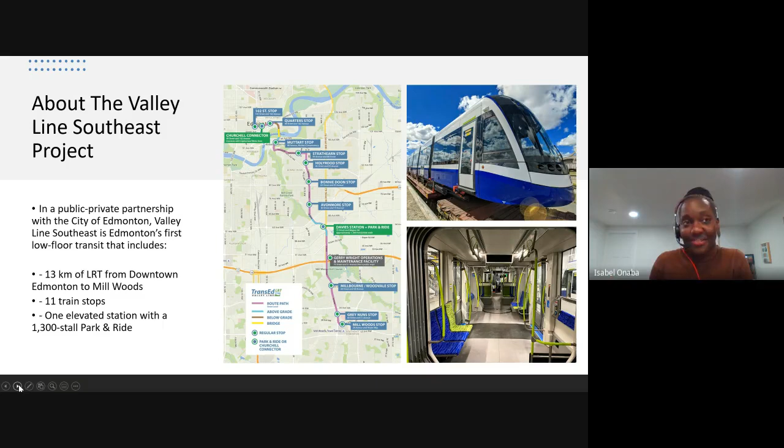Look at that train, look at the inside of that train, it's just so beautiful. I don't even think the photo does it justice, it just looks as amazing as that. That's right, even better. Yeah, I've been in it myself. It's an amazing piece of work for sure, and we're going to hear more about it later in the presentation.

TransEd, for those of you that may not know, is a consortium of Bechtel, Ellis Don, Bombardier, and Fengate.

We are a partnership working with the City of Edmonton as a P3. This is the first and largest one the city's ever done, and we're really excited to be a part of it. We're nearing the end of construction, moving into commissioning. We're anxious to get the public on our trains and operate this system for 30 years. TransEd isn't going away at the end of construction; we're here for another 30 years to operate this system for the City of Edmonton and its citizens.

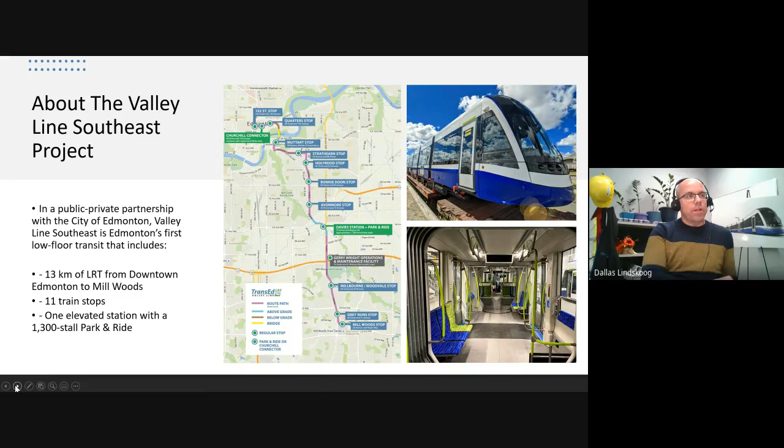Welcome aboard very soon. I think we're going to start in the downtown area. So Ken, I'm going to bring you up on this one. Why don't you tell us a little bit about what we see in the photos here right now?

Sure, I'd love to. I am the area manager responsible for downtown, and we're building an LRT—actually more than an LRT. We're building from face of building to face of building with tremendous coordination and patience from the local residents, businesses, and communities. Thanks to them for their patience as we work hard to build it right and coordinate as best we can, getting down to the last stages of the heavy civil work.

What we're looking at here is Harbin Road. We are pouring the Class B on the left, and you can see where we're topping off with the finished product, the paving stones, on the right. In the background you can see the Chinese structure, the main structure—there's still some artwork to go on the roofing, but that will be the Chinese structure when we're done.

That looks like a hole in the ground—is that the tunnel portal where the train will come out of the ground? That is the tunnel portal, where we come to grade, right at the corner of Jasper Avenue and 95th. You can see in the background we're loading one of the tunnel fans into the portal, which is now sitting in the tunnel. We can talk about the tunnel in a little bit.

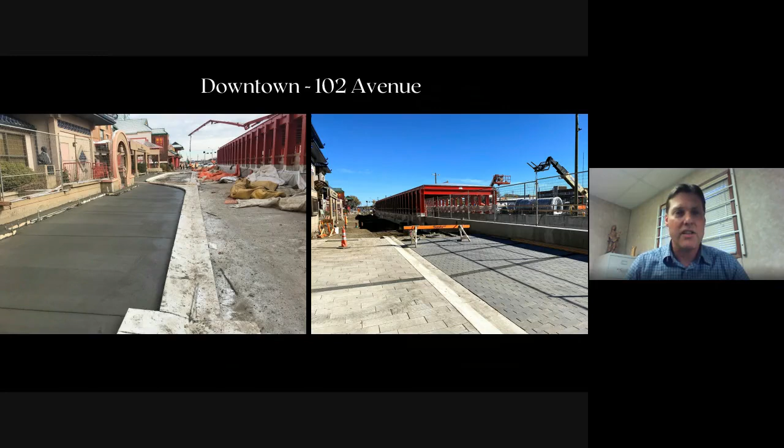Some other interesting things we've done this year: like I said, we're building an LRT station, but we had to build a 2,700 cubic meter underground storm tank to take all the flood water that might affect the City of Edmonton and collect it—that's underneath our track slab. We have also built a resilient track slab in front of the Winspear and Citadel, which we affectionately call the bouncy track, because we have 200 meters of track slab that sits on springs to reduce vibration and noise. It's been an exciting year for the civil works downtown—we have a tremendous amount.

That resilient track, that's right in front of the Winspear and between there and the Citadel—is that right? So that's to prevent noise of the train passing by those important cultural centers, is that correct? Noise as well as vibration, that's correct. That whole track slab is elevated and sitting on springs—very big springs, bigger than the ones on your big pickup trucks. So we're not going to feel any movement if the train's going over top of these springs, it's not like the train's going to bounce, a bouncy track through there? No, there won't be movement—it's to help with noise and vibration, but us construction folks like to coin phrases and call them something a little simpler.

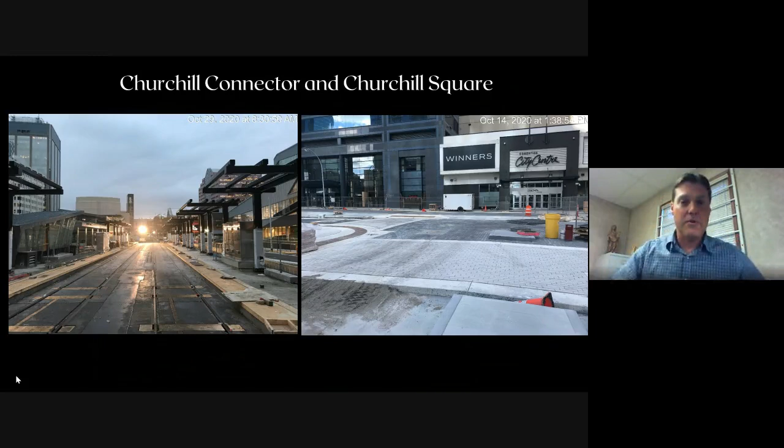Essentially, passengers will get off our network and go through the connector station. We're finishing the dress out of the connector building, putting in escalators, doing the mechanical, electrical, and the system. Our whole traction power system for the downtown network is housed in the basement level of the connector station. We're doing the building finishes and just getting to the systems part, which Eric will talk about later. If you walk by that building, residents of Edmonton in the downtown area would have seen a hole in the ground for a while. We were doing a lot of work underground, installing those systems, all rooms below the surface. What we see above ground is really just the connection to stairs, escalators, and elevators. That's why we call it the connector - it ties right into the existing station at the mezzanine level.

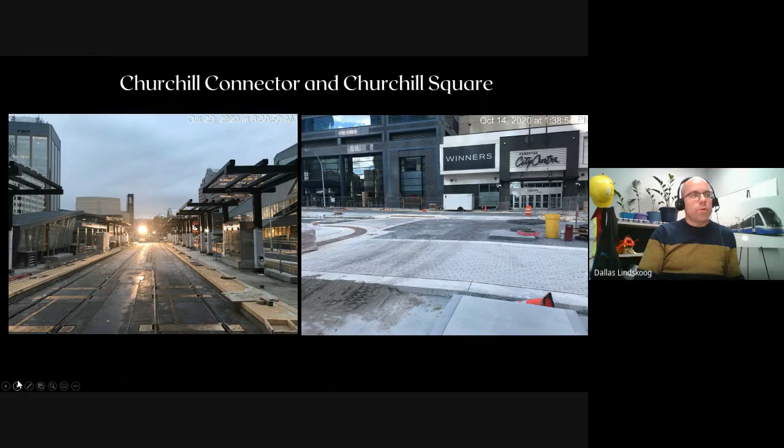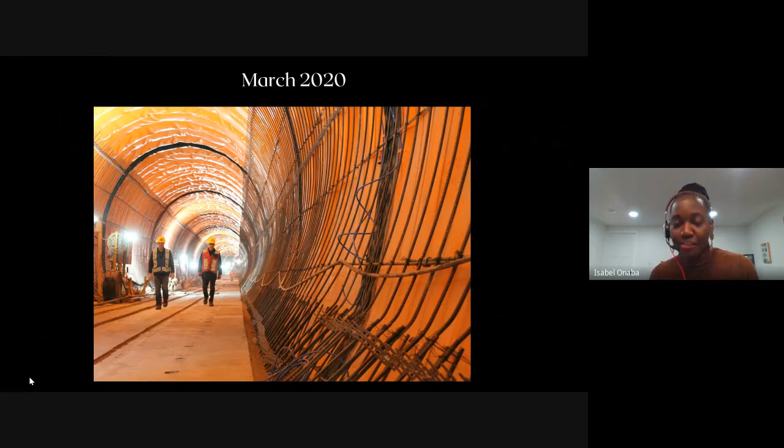Awesome, Isabel, I'm going to hand it over to you. Okay, so for me, this photo is one of those that's like slow motion, movie worthy, like cover of a movie actually. This is one of the photos we took at the media event, I think it was in March, when we had media come by to look at the progress we'd made in the tunnel.

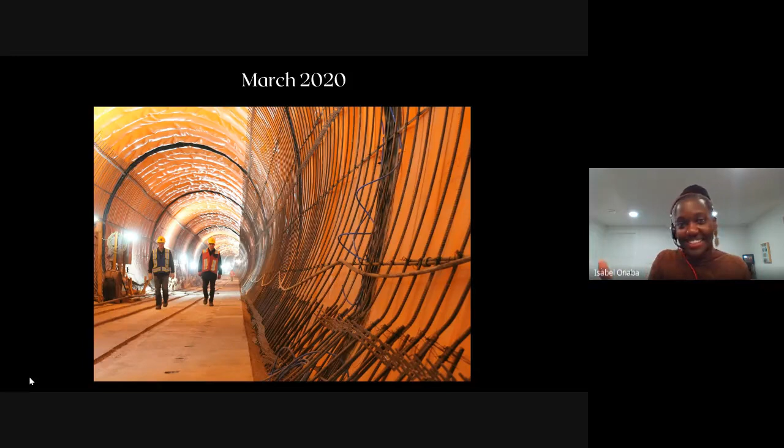Isabel, talk about those two gentlemen in the picture. Those guys are just viewers really. Not too much to say about them - that's Mr. Ken Sullivan there. Couple good-looking guys right there.

All right, Ken, tell us a little bit about what we're seeing in the tunnel. Sure, this is actually a really great photo, Isabel, nice job on it. The vibrant orange is a PVC waterproofing membrane, so the tunnels are a completely tanked waterproof system. What we're looking at in this picture is the waterproofing and reinforcing steel, getting ready for the concrete pours. You can see that Dallas and I are walking on the invert slab - the invert has already been poured in this photo.

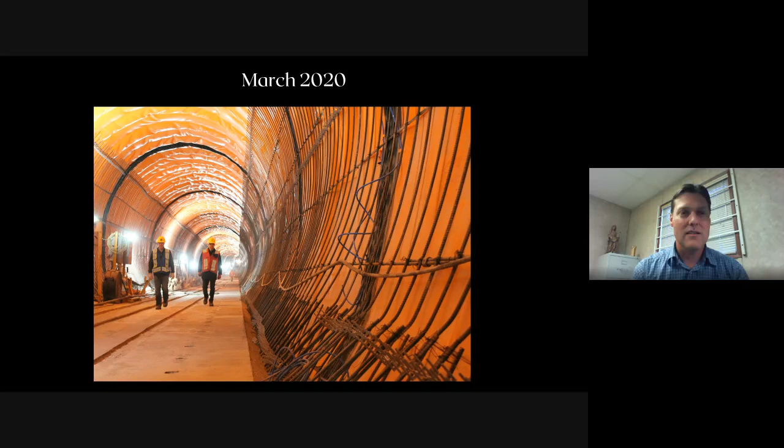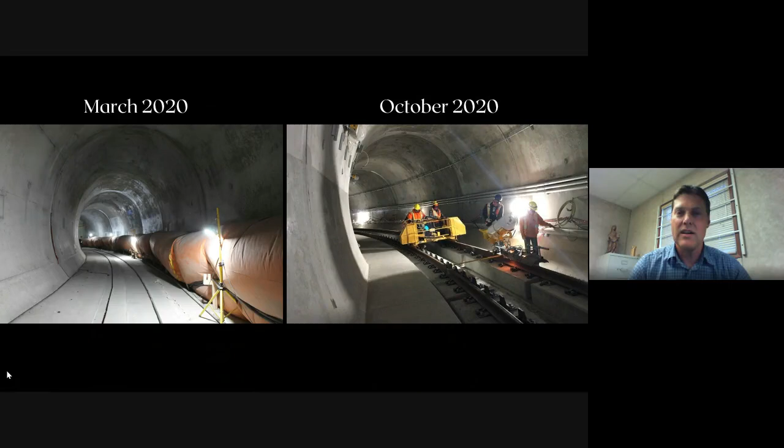Let's take a look at the next slide. One thing I should have mentioned - we have twin tunnels, both 6-meter diameter. Dallas and I, the photo in March was in the northbound tunnel. This is a picture on the southbound tunnel where you can see the actual arch concrete, the final lining, has been cast. Between March and now we've spent a lot of time - we've cast in walkways, put in the plinths, which is what the rail actually sits on, elevated concrete slabs. You can see us fine tuning the rail in the right-hand photo, and a lot of the electrical lighting going in. We're really at the finishing stages of the tunnel.

All right, I think we're switching over now. Yeah, this is the Tawatinâ Bridge.

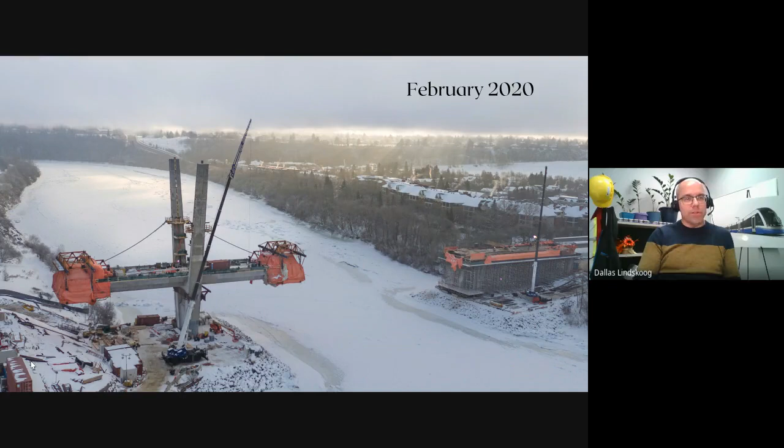All right, bringing in Mr. Brian Connolly. Brian, why don't you tell us what we see in the picture here back in February, and walk us through the progress of installing the cable stays. We see one in the picture there, but you have a lot more information that I think you can share with the team and with those watching today that they'll find interesting. So take us through that, would you?

Yeah, I'll take you back to a time in the project where we're all looking at this giant gap between the north and south of the river. I'm wondering if we're ever going to get there. And certainly when you look at the weather in that picture, everything is frozen, everything's dark and it's bleak, and our days are quite short. We wondered at what stage would we touch down on the south side of that river.

But for all the bridge aficionados out there listening, the Tawatinâ Bridge is an extradosed cable-stayed bridge. I'm not going to get into the details of what makes it extradosed, but a key feature is the shortened tower heights.

So there's a lot of work going on with the slab itself, a significant amount of work in the slab and the post tensioning to take some of the pressure off the shorter towers. But in this photo here, we're just at segment 6. There are 21 segments that get us across the river and 21 segments that bring us back up to the tunnel, and it's the first segment that takes that cable stay.

At this stage, everything is well hidden within the hoarding structure that we've got there. But there are two elements to the system: we've got the guide pipes and the anchors that are cast into the deck segments, and they angle. The guide pipe angles the pipe coming out of the deck, and it points it up towards the tower itself.

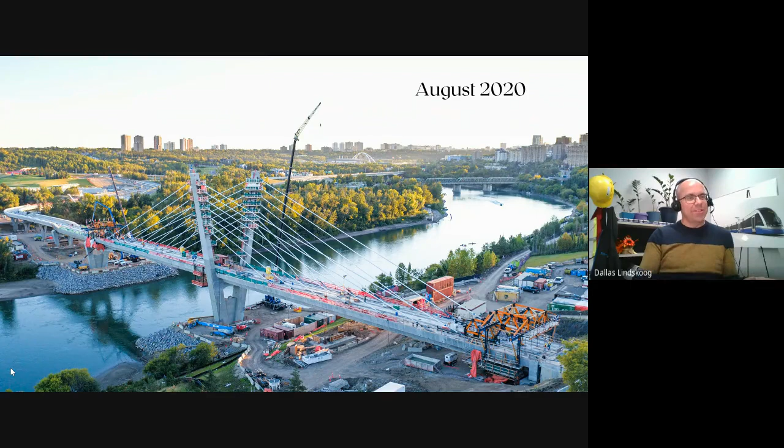Okay, don't hide the number though - you got to tell us, how close was it? Oh, we were within 4 millimeters on our last pour. Wow, which is pretty impressive. Yeah, we're disappointed in the 4 millimeters because we were trending so good, but that last pour, there's just so little opportunity to manipulate the bridge with small adjustments, and then you get it.

But certainly now all 7 stays are in, and at this stage they're tensioned, so we're going to call that stressing, for want of a better word. As we move out to the next segment - so on the previous picture you've seen segment 6 - as we move to segment 7, there's no stay on segment 7, so we get an opportunity to stress those stays and pull those segments up into alignment, and then you move on to segment number 8.

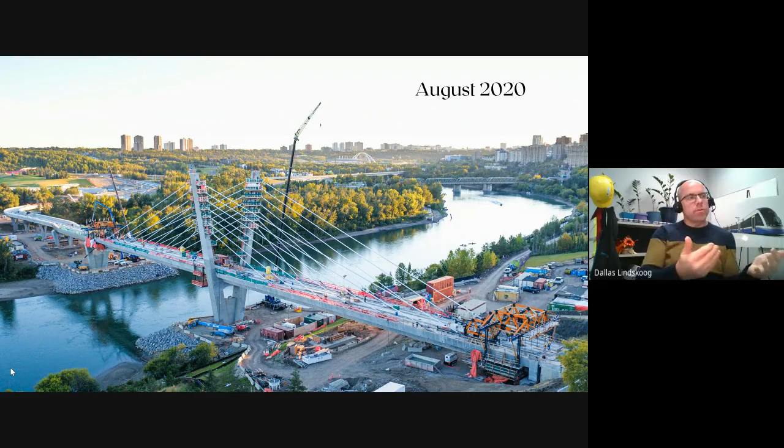So wait a second - you say pull them up. Like, when you stress those cables, when you put tension on those cables, are you saying that will actually bring up the bridge on the ends? You're putting that much force into it?

Oh yeah, absolutely, during its temporary state. And this is the beauty of trusting the engineer and trusting the construction process. The further away you go from the tower - we go back to grade 4 schooling here - and we get to the fulcrum and the lever, and the further away you go with the level of effort, the bigger the deviation is.

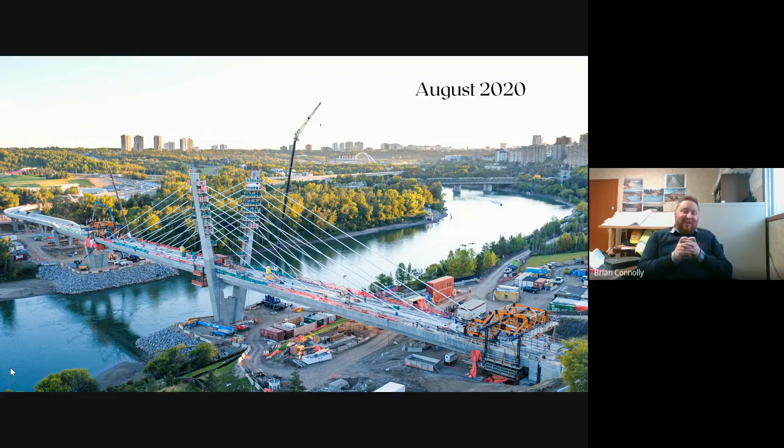We got to the scenario, we got closer to the closure pour, which is the final pour that connects us from north to south. Prior to pouring our concrete, you're looking at about a foot and a half of a difference between where the concrete is pre-pour and after pour, and that's all done with your stays, with your dead load of the concrete weight and the rebar. So you stand on at one stage and you think you're shooting for the moon, and then you get all your load on and everything ties in neatly.

Wow, that's amazing. I have a quick question for Brian. So when you did that final pour, were there any tears of joy just to see the end of this bridge and just to be like, oh, it's now won?

It was, I wouldn't say there was tears of joy, but there certainly was an incredible amount of satisfaction. I think we'd seen through that process, and you've probably seen some of the photographs there, the amount of people it took to build this bridge. We put a flag up of every nation on the bridge as we were constructing it, of everybody that came together to build this bridge. On that closure pour, in a COVID scenario where it's difficult to get people together and celebrate, we all stood 2 meters apart and looked around at each other and virtually patted each other on the back, because it's an incredible achievement. Given the season we had, everything was frozen, everything was hoarded up, and to get through that phase of works and into the summer, it was a 7-day-a-week schedule, 12 to 16-hour days. It was joy. It was a relief. I don't know if there was tears.

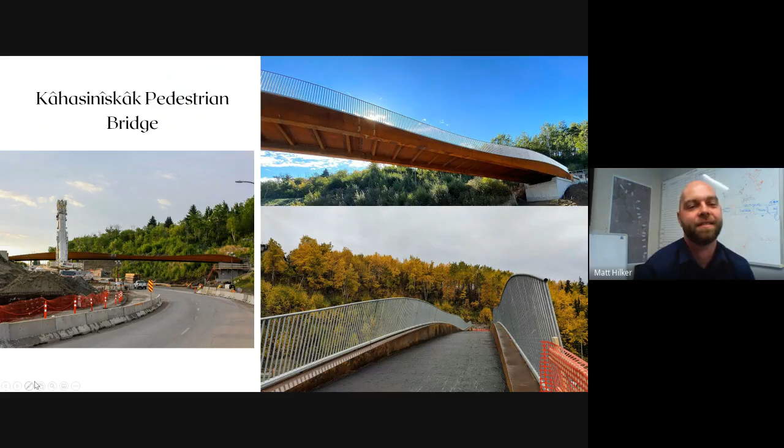So this one, as you can see, it looks a little harder to pronounce. I'm going to put Matt on the spot just because I'm picking him, he's the first one I looked at on my screen. Matt, I'm going to let you try. I've got the Davies Station, that's easy enough, Davies, the D. The Kâhasinîskâk pedestrian bridge. Ooh, so close. Actually, that's pretty good, not bad. You give me a hand? Yep. All right, the way you say that is Kâhasinîskâk.

Kâhasinîskâk, another Cree word. And Isabel, what does it mean? One second, let me just find that. Oh, I'm putting you on the spot now. Okay, well, you look that up. I'll tell the folks a little bit about this bridge.

So this, again, replaces another pedestrian bridge over Connors Road. This is as you're heading up Connors Road. The original bridge was a little too short, you can't get the trains underneath it, so it needed to be raised. In the process of raising it, it was also replaced. Additionally, for those familiar with the trail systems in the river valley, there was a 90-degree bend on each end of that bridge that was a fairly hazardous bend for cyclists coming through. Maybe not someone walking or running, but cyclists for sure had to make a pretty tight bend as they were coming down the trail system. So as part of raising the bridge, it's also been realigned slightly. It crosses Connors Road now at an angle, and it also has an additional pier located between the roadway and the trackway. Beautiful bridge, you can see some design elements incorporated into it.

The whole project here is interesting. For those who may not know, there's a lot of effort put into the architectural designs that TransEd's been building here. We call that sustainable urban integration, and it touches absolutely everything that we build. We have architects on the team working directly with the city and following their requirements, which are very important to the city, to make sure that everything being built is integrated with the environment it's located within. This Kâhasinîskâk bridge is no different than anything else on the alignment, so we're proud of that. As you can see, it's well underway, construction open to pedestrians and cyclists right now, so get yourself down there and go for a walk in our beautiful river valley.

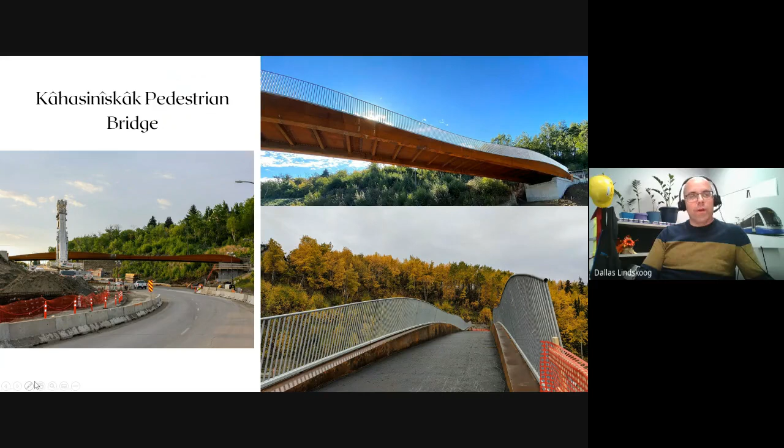Kâhasinîskâk actually means slow moving water over stones. Awesome.

Okay, let's keep moving. Let's go to Marisol to tell us a little bit about landscaping. People have been seeing lots of beautiful things happening around the tracks and the train system that we're putting up, so give us a little bit of an update. Yeah, this is actually perfect to talk about landscaping because we were just looking at areas on the north and south sides of the river and around Connors Road, where we've done a lot of landscaping over the last season. Along the alignment, there are a lot of areas that require landscaping along the track and the residential areas. But part of our landscaping is also to do restoration, which is really neat. So some of the things I want to highlight are about the types of restoration we're doing on the project and have completed so far.

So in total, there is about 5 acres of landscaping that we're doing on the project, but that includes restoration. We have naturalization areas, native forest restoration areas, and also some fisheries habitat enhancement and offsetting areas as well, all encompassed under that scope of restoration.

In the photos you can see, some of the really neat features in the restoration work we're doing is, one, we're reestablishing the native plants that were already in that area before we disturbed it with construction. We want to restore these areas back to how they were before with that native vegetation. In that big photo, that's actually on the south side of Connors Road, and you can see a few of the different features we've installed.

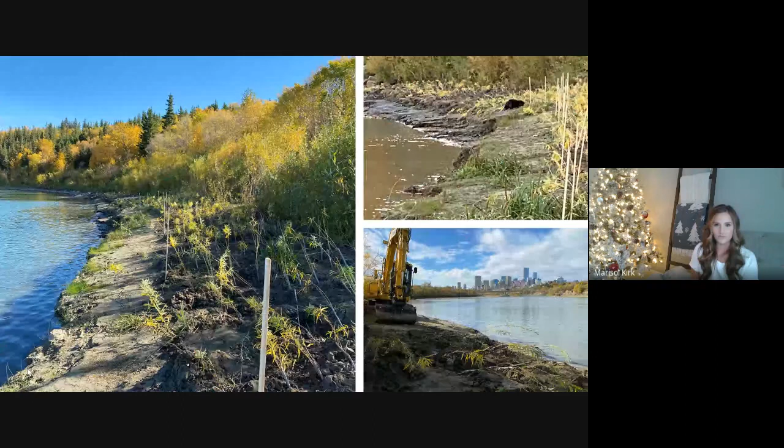So if you go into the next slide, a lot of people might not know what live stakes are. The ones in this photo are part of our habitat enhancement for fisheries. A live stake is essentially, it looks like a stick - you're not taking a typical plant with a root ball that you'd install into the soil, but essentially you take a cutting from the plant material and install that into the soil, and eventually it will sprout.

It's going to develop roots, which helps us stabilize the soil and prevent erosion. In these areas along the river, that's also going to provide shade and develop a really nice habitat for fish, with protection and cover for them and other wildlife too. This is something we completed this fall, where you can see all the leaves sticking up along the bank - those are all the live stakes of willow that we installed into the riverbank.

Marisol, that picture on the bottom right, that's an excavator beside the river. Is that the Tawatinâ Bridge in the background? It seems like we're a long way from the bridge. What are we doing working so far downstream?

So it is a ways out, but part of the bridge construction involved these big berms in the water, which took up a pretty big footprint in the river. Part of our requirements to get approvals to do that work in the river was to do some fisheries habitat offsetting, since those berms took up good habitat for fish to spawn and thrive. So we had to create areas to enhance the habitat. We identified a few locations along the south bank of the river where we did restoration treatments using gravel bar, toe staking, and live staking to help create more habitat for fish.

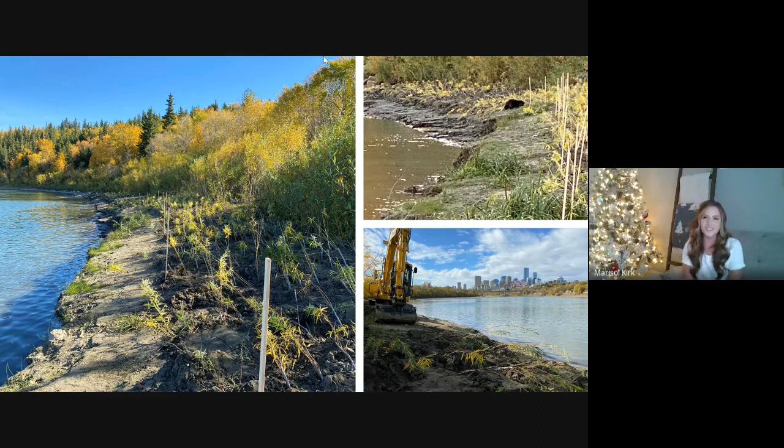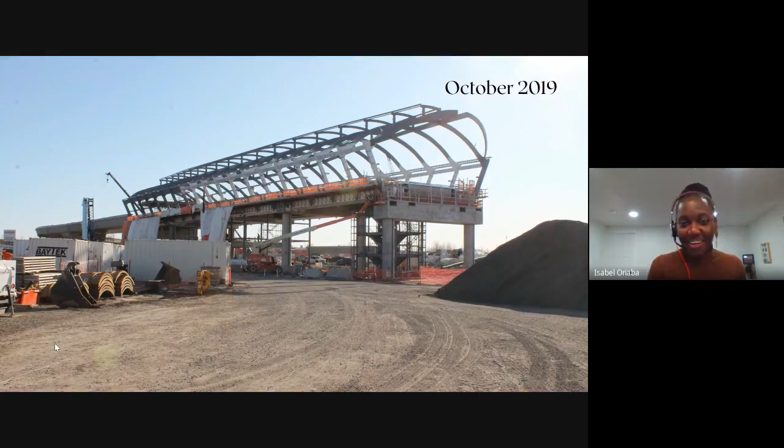All right Matt, I think we're heading down to Davies Station now, buddy. So shine up your forehead, tell us a little bit about what's going on down there. Actually wait, Matt, before you start, is your full name Matthew? I always wondered about that. Carry on, sorry. For a while I was the only Matthew on site, it was bizarre, now there's like 6 of us.

So Davies Station - thank you for letting this clip go after Marisol's, where it shows the beautiful environmental view, and then it shows Davies yard as we're building up around it. So this is Davies Station from October of 2019. That seems like a lifetime away already.

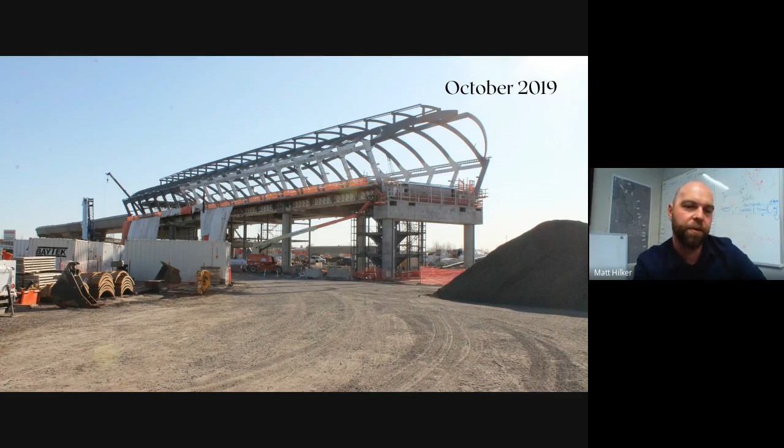A little bit of detail on this picture - you're driving in, looks like coming in off of the north side, off of 75th and Davies and Wagner. But let's go to the next slide, I think we'll see that a little better. Yeah, you probably see it better, ignore the snow, but there you go.

So here we're looking at it in January. Your roof steel is done. Underneath that hoarding where you're seeing all that orange and white is a ton of activity. So what we were doing in that time is the masonry walls were going up on the outside. We were starting to build in all the concrete slabs and everything on the inside of that building as the steel was going in, and you can see the little starts of that timber roof starting to go through.

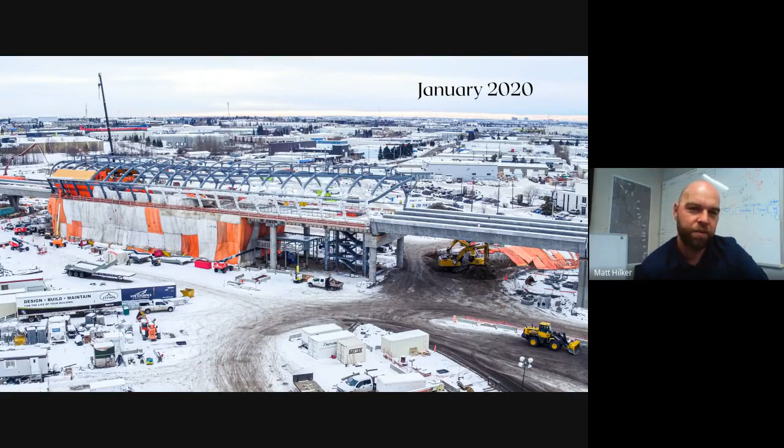So we're going to see more of that in a second here. Yeah, here we go again. As you're driving up 75th, you can see that Davies yard at this point was full of trailers and work - I think we might have even still had the site trailers in on that point. The crane jumping in to get all of that work in.

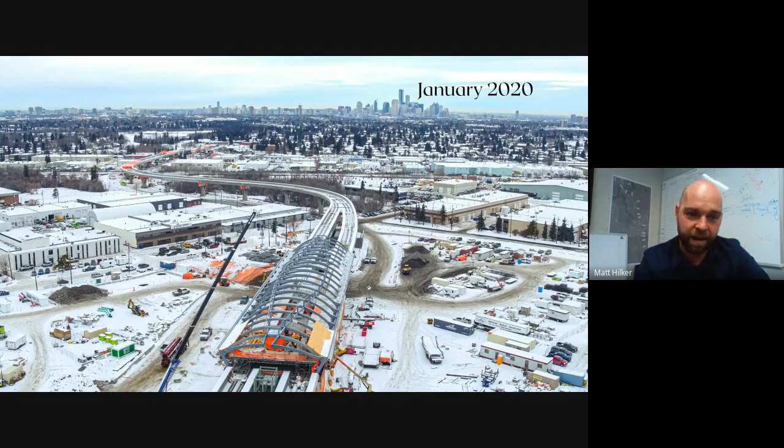That roof steel was a pretty impressive thing to get in. We had to build it up in sections just because it was so wide to get it across the double spans. We had to put in what we called the hockey sticks, which are the vertical pieces that connected up to the track. Then the arches and the clerestory sat in, and they had to get the guys to weld it into place. So it was quite the undertaking, but we got it done. Yeah, fantastic job, I love that photo.

Actually go back for just a second - I mention this anytime I get the opportunity to. What you see in the background on the left there is the elevated guideway, that's the portion of the track that Transed's building. It's about 1.2 kilometers long, if I remember right, and it takes the tracks up over 75th Street, which is a busy commercial corridor, through the Davies Station and Davies Park and Ride, and then over and through Wagner Park, which is the second bend in the photo here. It crosses the railway as well, the heavy rail, and then over top of Argyle Road, comes right back down onto the center of 83rd Street. So about a 1.2 kilometer section, a great place to take a look. If you're driving by now it's very obvious, and something that's very unique in the city of Edmonton as well.

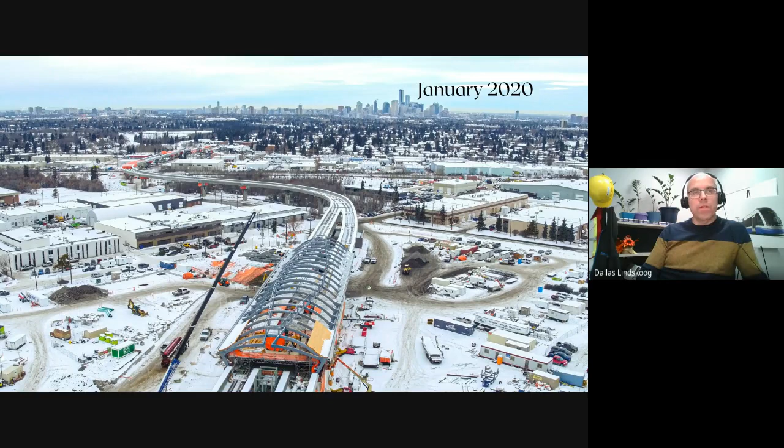What's a soil cell? That sounds odd. Soil cells are underneath, and what they do is retain everything for the soil underneath it so it can be properly set before all of the paving and everything comes in. This allows the environmental and landscaping elements to move around it. There's 2 or 3 of them in the Davies Yard area, which you'll never know about because the entire thing is going to get asphalted and paved.

Yeah, so that was a loaded question. Most of my questions, I probably figured out by now, but the primary reason we put the soil cells in is to provide the soil medium for the vegetation above ground to grow, especially in a parking lot. There's 3 or 4 of them, massive, long stretched soil cells through the medians. I think the public will appreciate that when this park and ride is done and you see all of the trees, you can assume there's a soil cell underneath providing all kinds of soil medium for the growing and health of those trees. It's fairly unique, but also fairly common in parking lot areas and commercial construction.

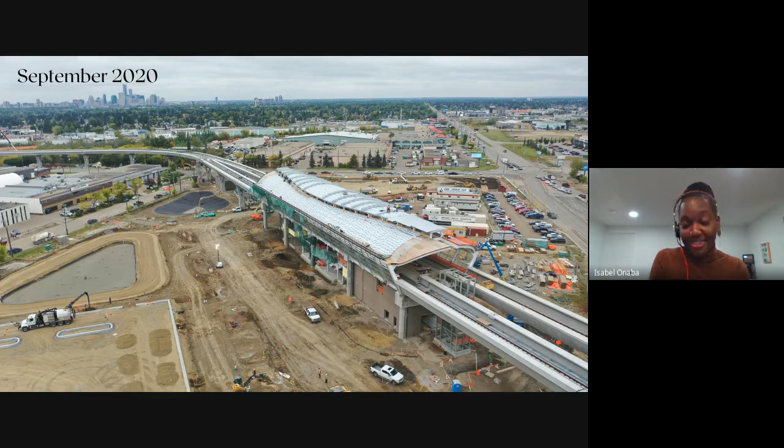There will be. You're going to have to go downstairs to the kiosk, but there will be a place for coffee. Excellent, so a little kiosk of some sort on the mezzanine level. Yeah, there's a little kiosk sitting there that we definitely had to route in, in case somebody needed a coffee to get in there. So yes, you will be able to get coffee. You have to go all the way down to the bottom, the main floor, but yes, you can get it. If you're in the park, you'll hit it right as soon as you come in.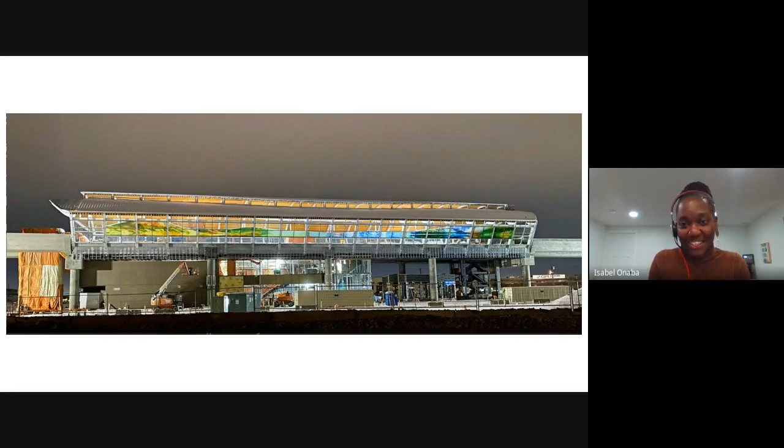My sister-in-law was driving down 75th Street a few days ago, and she came home and said, Isabel, I cannot believe how great this place looks. She was pretty amazed. I feel like my family doesn't believe what I work on, or that I'm actually doing this project, until they see actual steel structures like that. So it's a beautiful, honestly, station. Yeah, and it was amazing when we got that art glass in, it was an undertaking.

That art glass came from Germany. It was being fabricated for 10 months. Design development of it took well over 2 years.

What you're looking at is a landscape, an integrated landscape. I won't get into too much depth or the public artist will kill me because I don't know as much as she knows. But when we got it in and turned on the lights, it really finished off that building, and everybody took a few minutes to sit back and say, wow, that looks fantastic and complete. Just the angle you get from that platform looks fantastic.

So it was a gigantic undertaking. It's very interesting how they got it in. They used a glass manipulator that basically suctions up the panels and lifts them into the air from the ground through a gigantic elevated crane, sucking it into place as the guys beside it put in the clips. They managed to get in all that glass, about 52 pieces in all.

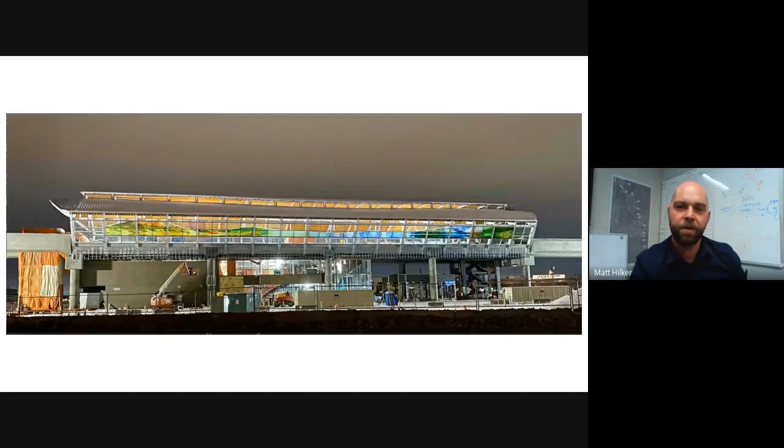So let's go to the next slide, and Matt, tell us how you build that wood roof. The wood roof, that fantastic wood roof, was 15,498 pieces - not that anybody was counting or tracking. That wood roof is a structural timber roof, an SPF roof that was procured, stained, and installed in sections.

It was a very complicated, very difficult thing. It's hard to really see, but the arch and pitch of that roof is very extreme, especially where it comes down in the middle. So what we had to do is build a gigantic scaffolding system in the middle of that station that rolled, which we called the dance floor. We had to put in the panels and nail them in the exact pattern, because it was structural, in order to hit all of those different steel spans.

So what you're looking at is 90 meters of structural timber roof, 2x6 put on end, nailed - a ridiculous amount of time. But once we got that thing in, closed in, and all of that steel was painted, it looked fantastic. We found ways to utilize it, because it took us roughly 3 or 4 months to get that roof down.

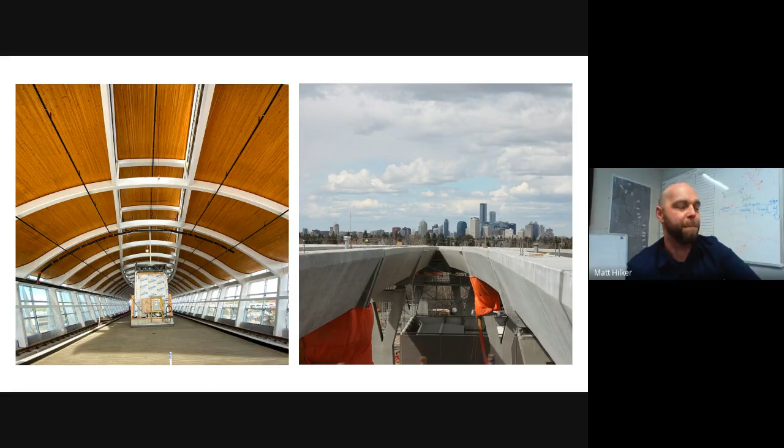Great job. Hey, that photo on the right reminds me, I forgot to point out something earlier. Shout out to Mayor Iveson - we took him on a tour shortly after the wood roof was done, and he stood on one end of the platform. You can't see it, but if you combine these two pictures, in the middle on the left is the framework for an elevator. But if you look beyond the other side of that, you can look out the end of this Davies Station, and framed by this beautiful wood roof is the city skyline. It's an absolutely stunning picture, much like the art glass.

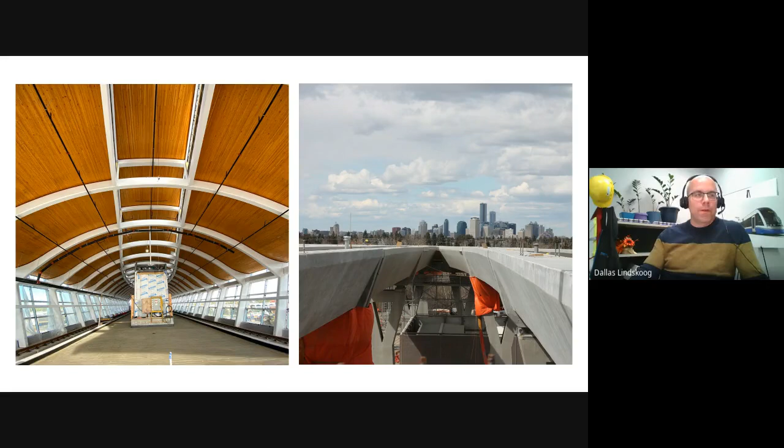I think the next slide might talk a little bit about the parking lot, because it is a park and ride. How many stalls, how many parking lot spots are there, Matt? Somewhere around there - what is it, Dallas? 1,300.

Yeah, a lot for sure.

This area is also a transit center. Around the station you can see stalls where the buses will pull in. It'll be a full-on ETS transit station with a taxi drop-off and a kiss and ride, so it's a fully integrated transit hub for the Valley Line. It's in the middle of an industrial commercial area, so a lot of people will park there to head downtown. That's exactly what it's intended for, so certainly a hub of transportation for the Valley Line.

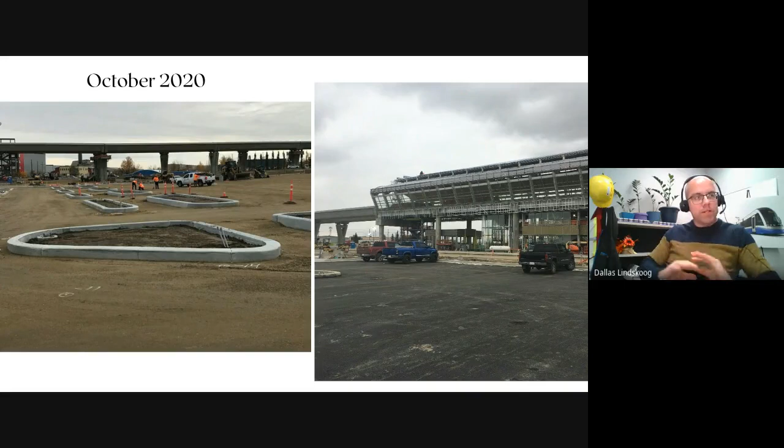All right, Eric. OMF is Operations and Maintenance Facility. So operations and maintenance, Eric, tell us a little bit about this.

I love this facility. It's really, really well made, and it's built to house all the trains delivered to Edmonton. A total of 26 are due by the end. We've got 21 right now, and the last ones are coming, all shipped by the end of the month. So basically this year, production of all 26 trains will be complete, and we will have all the trains either on their way to Edmonton or already there. Really amazing stuff.

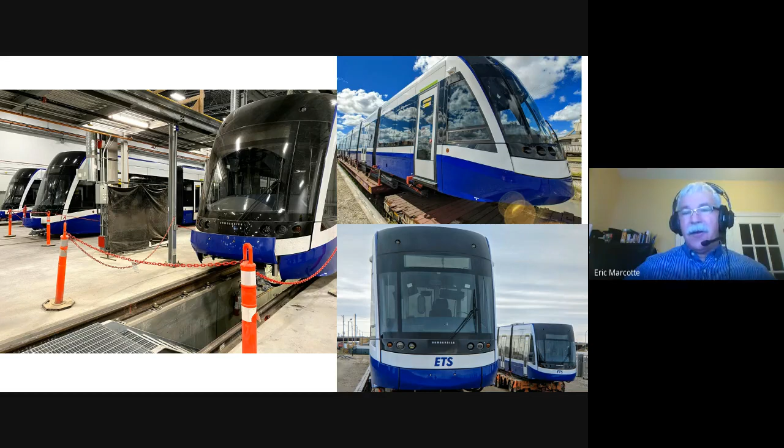A little bit of information people aren't necessarily aware of is that we have 8 plants involved in the fabrication of that train from all over the world. Kingston is doing the final assembly, preparation, and testing - dynamic testing of those vehicles to make sure everything is working and performing as intended, verification all the way up to the maximum speed of 80 kilometers an hour. All the other plants have basically completed their work. It's been gradual, but right now we only have the Kingston plant activities left, putting the final touches on the very last train before they're loaded into those trail beds and brought to Edmonton.

So what you see right now is the OMF, a very well prepared and organized maintenance facility. There are platforms on the side to allow us access to the top of the train, where we have all the power equipment and everything needed to operate the vehicle. The LRV, or light rail vehicle, is a low floor vehicle, so when you board the train you won't really have a step - it's at the same level as the platform, making for very easy access.

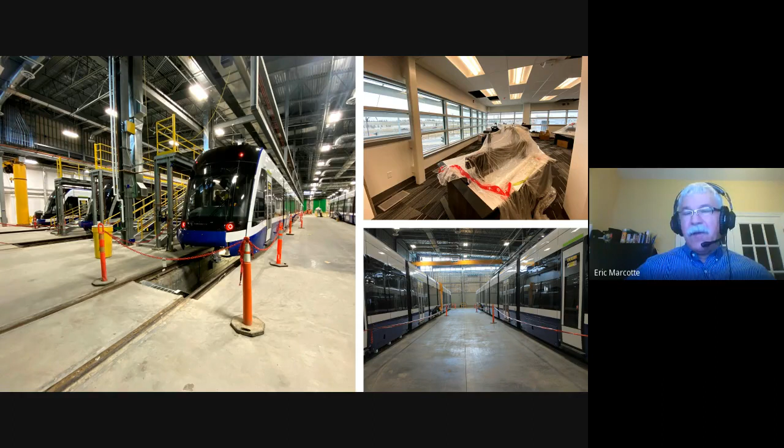You'll be able to bring in your bike, because we have some specific storage areas within the train to be able to bring your bike all the way from the south end into downtown if you want to bike into the downtown, but also to do the opposite if you want to visit your friends on the south end of Edmonton. We also have some special locations for people with reduced mobility, and it's all organized in a way that's really effective for everybody.

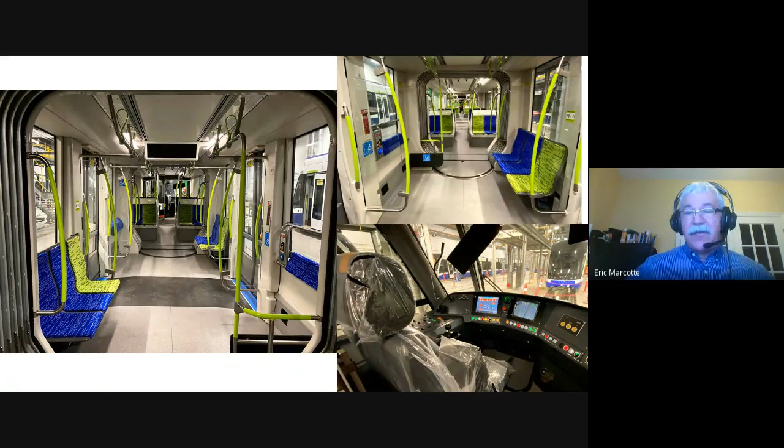So the interior is very spacious. Right now we can house easily 374 people per train. So it's a lot of people.

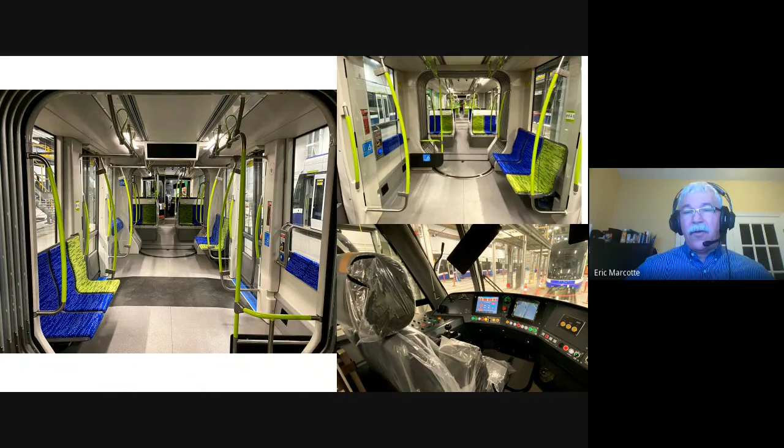It's also done in a way that's extremely economical for the city and for Edmonton. We have a train designed to carry that amount of people to be effective, but we're also being smart about it - we're actually saving energy with those trains. We're regenerating energy, so as we're braking, we're taking that power and bringing it back into the line to save cost and preserve the environment. Really smart stuff done by a lot of people, and a lot of very interesting technology.

Also, you may notice, it may not be so visible, but when you're standing inside the train, you can actually see through the wall of where the driver sits, and through the window of the driver - so you see where you're going. It's really quite interesting and different from the current system too. When you stand at the end of the trains the city operates right now, you can't see where you're going. You'll see that on these trains - you can see over the shoulder of the driver, literally.

So you're there, you see your station's coming, you say, okay, I need to start getting up and preparing. You've got the hand strap, you've got the poles, you're going to be able to get yourself ready.

And then I got a question for you. I got a question for you, I have to ask this. Okay, go for it. My grandma - I grew up with a grandma who was an amazing lady, she's since passed away - but she would keep all of her furniture covered in plastic. Please tell me that you're going to uncover that seat for the driver. You're not going to leave that plastic on.

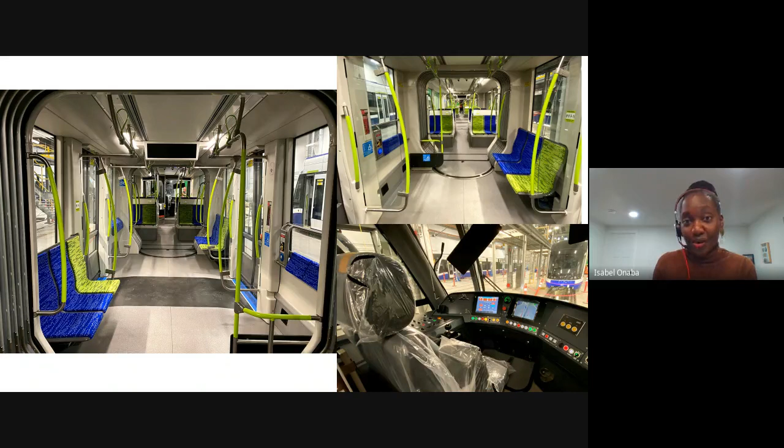One question for Eric - go ahead, Isabel. You go first. One question is that lots of people from the public have been asking about the amount of sound that's going to come from these trains. Can you touch on how much noise or sound is going to come from it when it's traveling? Because it's close to many neighborhoods too.

Yeah, so not a whole lot. And that's actually something to be really careful about, right? People think it's going to be making a lot of noise, and they're used to maybe freight trains and things like that are very heavy. Well, this is a light train, and even with a lot of people in it, it's riding quite comfortably. It has a lot of wheels to absorb those vibrations and good suspension, so you end up not having that much noise on those trains. It's also a reason why whenever you get close to the track, you need to make sure that you cross at the right location.

You cannot assume that you will hear the train coming. It's very silent. Now, of course, we're very sensitive about noise and vibration, like for example downtown with the floating track, which is really a big spring absorber to make sure that we dampen anything that could remain.

We're actually making sure that we're going to verify the noise that is being made, and we're using special precautions along the alignment in areas where we may think it may be a little bit too much for some. So in all, there's a lot of different mechanisms that we're using in order to preserve the environment and to reduce the sound for everybody.

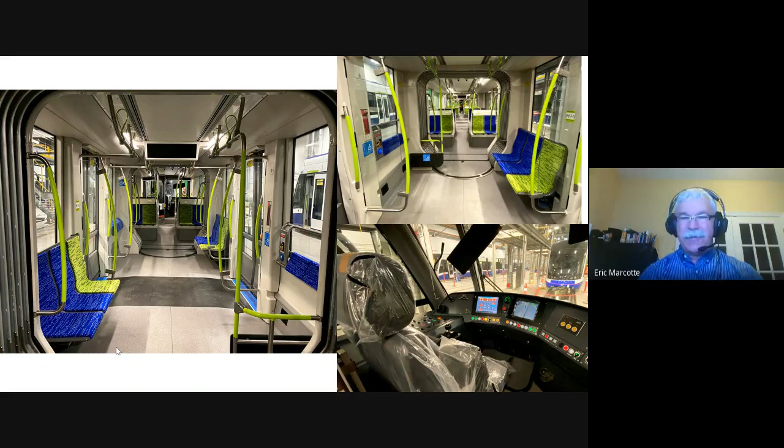That's a great segue. Let's talk a little bit about commissioning too. We're going to switch over to Brian here shortly, but I want to make sure people understand that the trains are out on the tracks. You can get down into the Millwoods, you'll see them running on the tracks now. That's a good indication of how we're progressing towards getting to passenger service.

So commissioning is starting in the south end. It's going to gradually extend towards the north end into the downtown. So watch for the trains on the track for sure. You're going to see traffic signals coming online as well. A lot of that infrastructure is up. A lot of the signal fixtures are covered right now, but they'll be coming online soon. So we want the driving public to be aware of that. Lots of progress happening in the south, actually the entire alignment happening that way.

One thing I want to point out that often gets asked is, are there crossing arms? Is there bells and gates at the intersections? There's not. This system is integrated with the neighborhood, as Eric has mentioned in the past, and the cars, basically the LRVs, the trains, run with the speed of traffic. They cross the intersections at the same time the vehicle traffic would cross. It's very integrated. It does not cause disturbance to the neighborhoods the way that some might expect. It's going to be very integrated that way.

So as a driver, the message that we want people to understand from the safety standpoint is just simply follow the traffic signals. There's nothing unique about it. If you've got a red light, stop at it. If you've got a green light, you can continue.

One thing that's unique about the Valley Line, though, is right-hand turns. Typically in North America, you can make a right-hand turn on a red when it's safe to do so. Make sure you're following designated signals for right-hand turns. You will see stop signals dedicated just for that turn, and that's because you may not see the train approaching from behind you or on your right, typically. So we just really want to make sure the public is aware of that, and just be prepared for that and follow the signals, and you'll be perfectly safe.

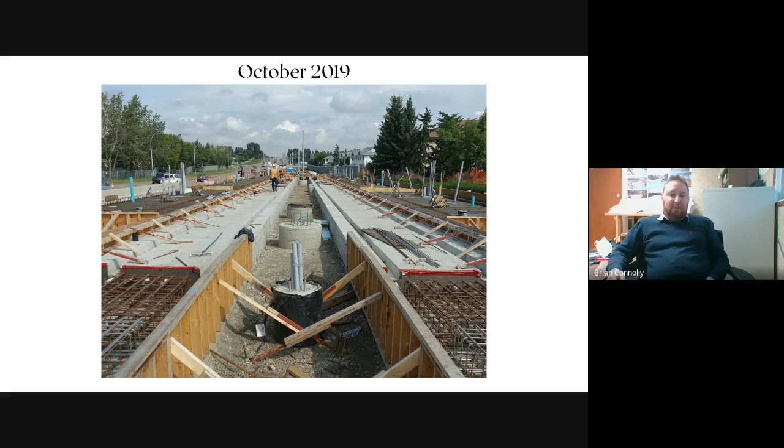It may not look like it, because there's not a massive change to the landscape, but we flipped that traffic multiple times to give us access to complete this track that runs right through 66 and up across Whitemud and onto 75th Street. The public has been patient all year, and they're beginning to get their road back now. We've been able to get the rail done right from Millwoods back up through the whole alignment. That area now has its OCS poles up, OCS being the overhead catenary system.

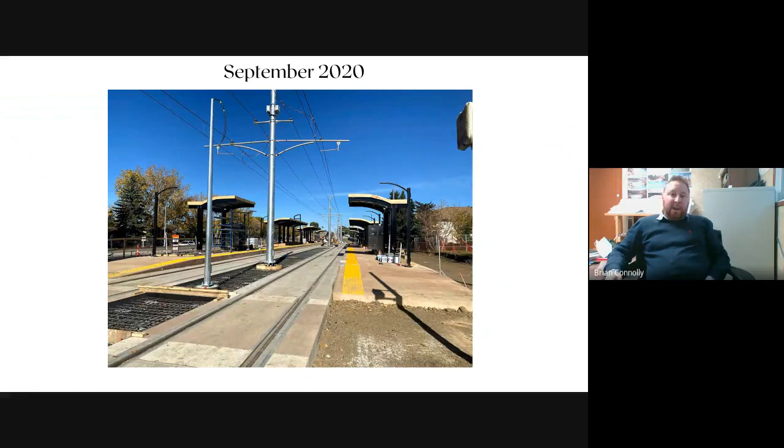Those poles you see right in the middle carry the power. I'll not pretend to know as much about power as Eric does, but we do need them to run the trains. That's the plan for the 2021 season, to get some trains out on that track and get them going at speed. We need those lines overhead to be fully energized, so be very aware that when the wire is up, the line is live.

You can see there we're flipping over and back between a couple of different photographs. We've got the rail here, which integrates quite well into the environment around it. There's a massive amount of landscaping done along 66th Street, a lot of planting, shrubs, and some trees. As Marisol touched on earlier, they're all native species from this area. The area has been completely rejuvenated because of this, and it looks incredibly well. Our track slab is fully completed through that area as well.

So you've got your rail, as Ken touched on earlier. It sits on these little concrete plinths, these little upstands, and small pads underneath them just for shimming purposes, and likewise for ridership comfort, so you're not bouncing rail off concrete.

I think we'll go look at some of the crossings where we're crossing some of the avenues - 28 Avenue, 34th Avenue, 38 Avenue - where we've got some of these crossing and signal bases in place. You'll see some signal arms in those areas as well. They'll be fully operational in the 2021 season, certainly when we're testing trains.

So for the public, just to be clear - point of clarity, Brian, when you're saying signal arms, you mean what we see in the picture there up in the top, right? You're not talking about the gates coming down, right? Just to be sure. Correct.

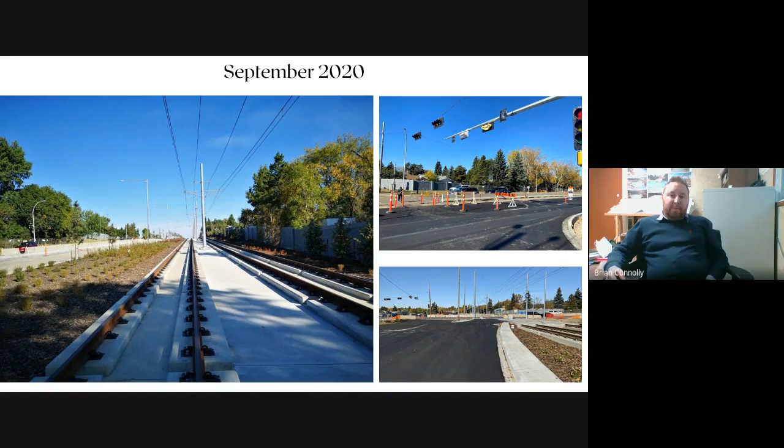So it's, you know, a very - you say you don't get excited about civil work, but I do. I'm a civil background, and for me, when I see asphalt, like you see there, the black top go down, that is the smell of completion. Some people don't like that smell, but I actually love the smell of asphalt. Call me crazy, but I love the smell of asphalt.

That is absolutely a sign of completion, and there's a lot of things that are signs of completion I want to point out to the public as well. We've mentioned a few of them on the call. The underslung pedestrian walkway across the river that Brian talked about earlier is going to be a sign for you that we're getting near completion. The OCS poles and all these overhead cables going up right now - you can't commission the trains until you have the cables and the power. So that's another sign as you see us working along the alignment to get that installed, and then eventually the trains running down there, another sign of getting close to completion.

What we like to tell the public is, first of all, we can't give you a date. We'd love to be able to give you a date of when this train is going to be operational. Two points to make: when you see the trains in the downtown area running on the track, you know we're very close. Go buy your ticket - and by the way, you buy your regular ETS ticket, nothing special, just the usual tickets. And now I've forgotten what I was going to say. We'll get to that in a second, Isabel. Don't worry.

Maybe one point that's important. Maybe one point that's important.

I want to talk about, we had said 30 years of operation. So what's really important to TransEd is not as much about when we're going to open, it's about being ready to open. We're going to operate the system for 30 years. We want to do it right. We want the quality of what's being built to be exactly what the City of Edmonton has asked for, what City of Edmonton citizens have paid for. And at the same time, we want something that we're going to be able to operate and not have issues with. So this system will not open until it's absolutely 100% ready for operations.

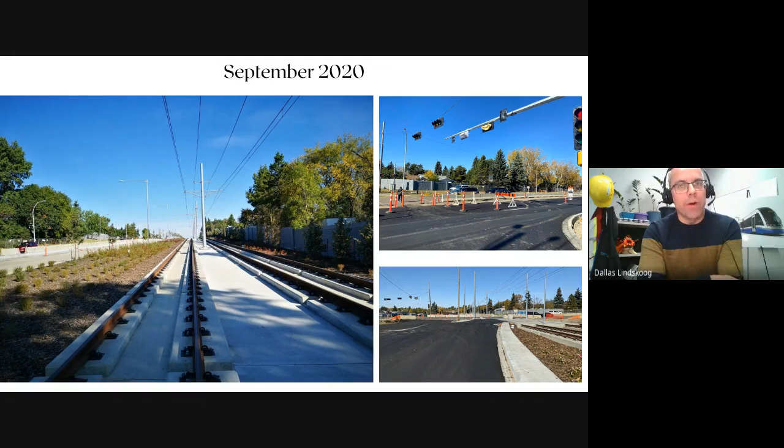All right, I think our next slide is the stops. Brian, tell us about the stops. I will do. And this is sort of the last defining moment of the project. We've seen the stations, we've seen the bridges, we've seen some of the rail and some of the OCS, but it's all irrelevant if you can't get onto the train. So these are the key areas across it. We've got 11 stops across the project that are giving you the access at road level.

I think Isabel, you touched on at the start of the meeting there that this is a low floor train. It accommodates all types of access, wheelchairs, bikes, whatever we need to get onto the train. It's low floor, and all of the stops that are now getting completed, you should see right through the alignment. We've got all of the steel columns up, and we're starting to put the roof on most of the stops and getting it ready now for all of the systems and little jewelry, we'll call it, for completing the project. So we've got some lights to go up, some cameras that'll go in, and some fancy glazing that'll go up with some artwork on it.

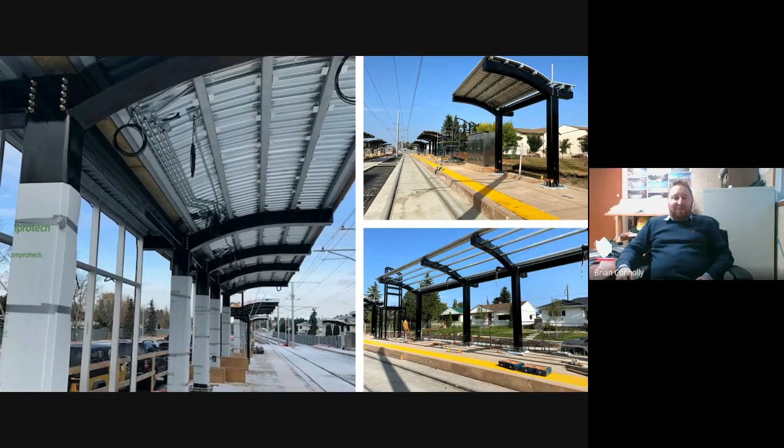That's all going to happen in the 2021 season, which just completes these stops and makes them ready for the public. So as Dallas touched on earlier, when you start seeing the line and some of these key milestones, when you start seeing the stops getting ready for turnover, they're getting ready to take a train. So that's the 2021 season, and we'll work through the winter on that one. It's good work, it's dry, it's above ground, and it's easy to get completed. We've got a 6-month window to get all of that done, and looking forward to seeing everyone's reaction when these are all completed.

Yeah, it's pretty exciting times for sure. It really is. And that brings us to the end. Sorry, Dallas, I feel like you're going to say something. No, go ahead. Sounds like yourself prepping, breath in there. It's that microphone breath. Please go ahead. No, I was going to say probably the same thing as you.

It's really a final shout out to our partners, the City of Edmonton. They've been walking alongside us as we work through 5 years of design and construction and coordination. So a big thank you to them. Thank you to our workforce and our subcontractors, like we mentioned before. Thank you to all of you guys for joining Isabel and I today and sharing your wealth of information and knowledge. You guys have done a fantastic job leading your teams. We know we've got another successful few months ahead of us, and we will all be riding those trains. And if Eric lets us, maybe driving them too.